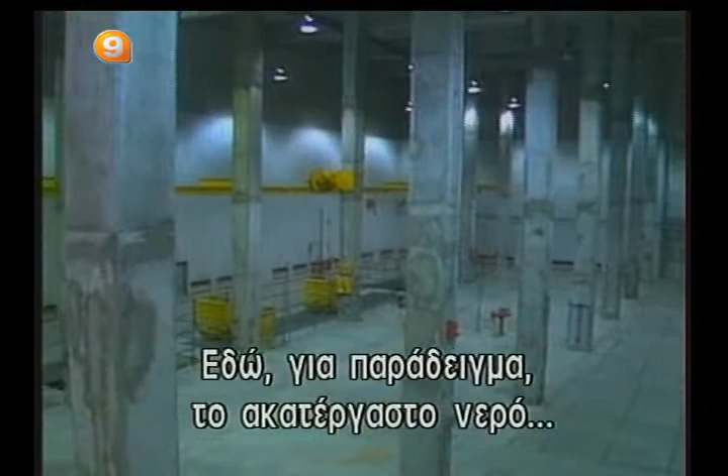Here, for example, crude water is drawn from the central part of the river, where the current is the strongest. It is gathered in concrete lines attached to the riverbed. It is then sent along a descending line that carries it, by gravity, toward an underground basin. The bottom of the reservoir is slightly lower than the riverbed.

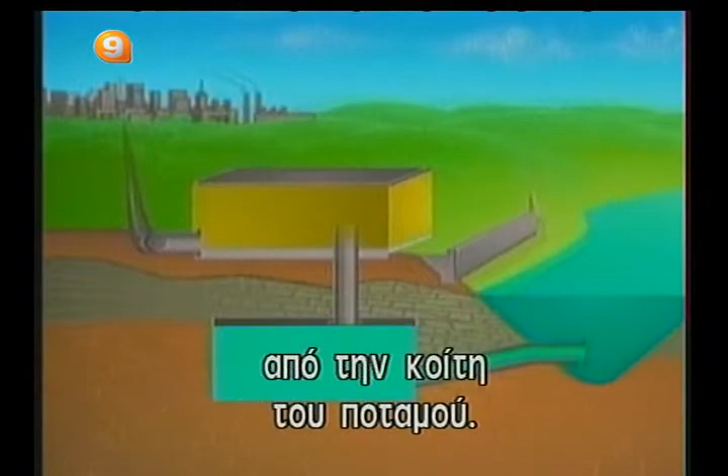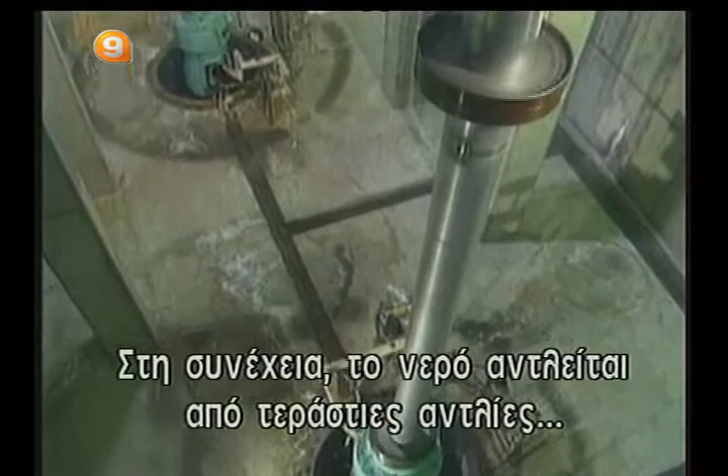When it reaches this first basin, the crude water goes through a rough preliminary filtration called sieving. It then passes through a grate composed of vertical bars, which eliminates large-sized waste. Next, the water is aspirated by enormous pumps, which bring it up into a canal located several meters above ground level. Through gravity, this canal carries the water to the plant.

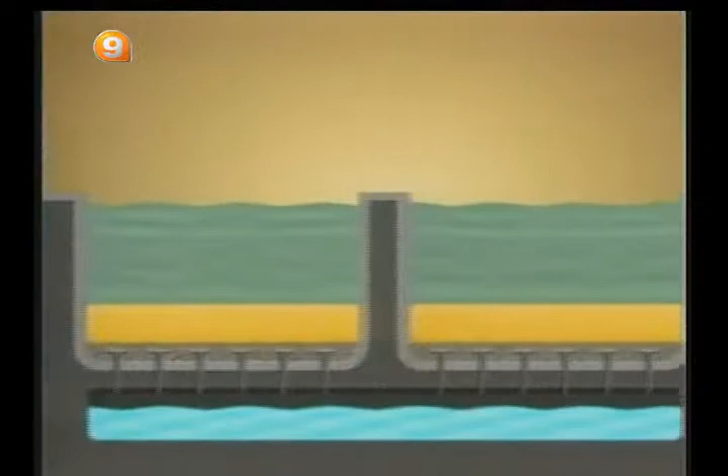The water is directed toward a gallery of 60 identical filters. Each filter receives an equal amount of water to treat. The filters consist of 2 tanks. Both are filled with a 1-meter thick layer of silica sand and a thin layer of gravel.

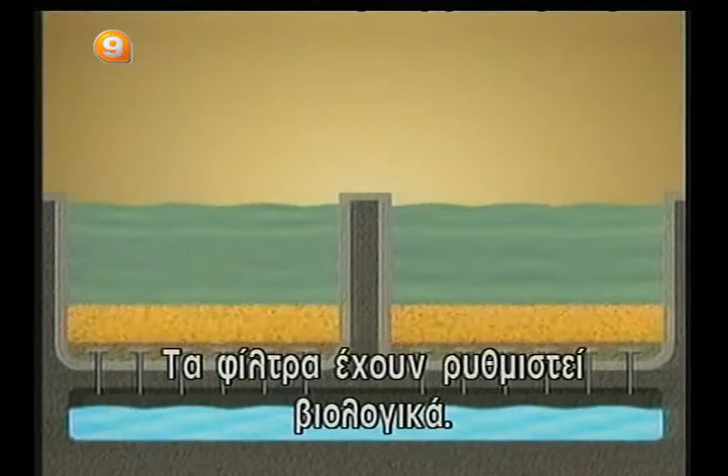The filters work 2 ways. By simple physical action, the sand and gravel capture a portion of the particles in suspension in the crude water. The filters have also been biologically conditioned. That conditioning enables them to digest the organic matter, such as fecal waste, present in the water.

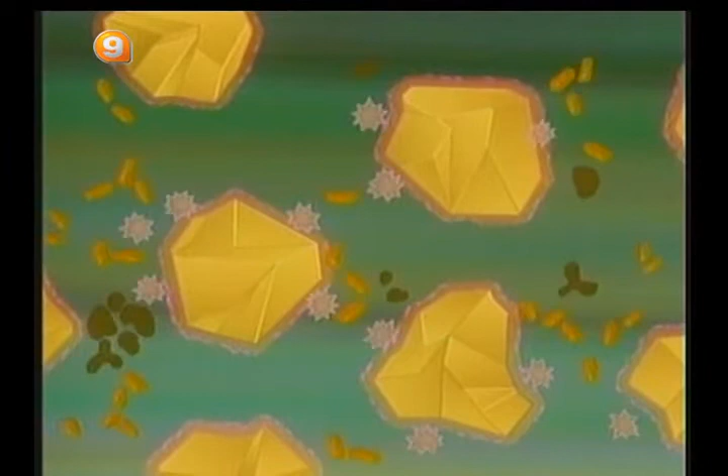A flora of microorganisms called zoogleae develops around every grain. Zoogleae feed on pathogenic bacteria and organic matter in crude water. Little by little, the filters become plugged with the matter they have entrapped. They are then all cleaned to restore their filtering capabilities.

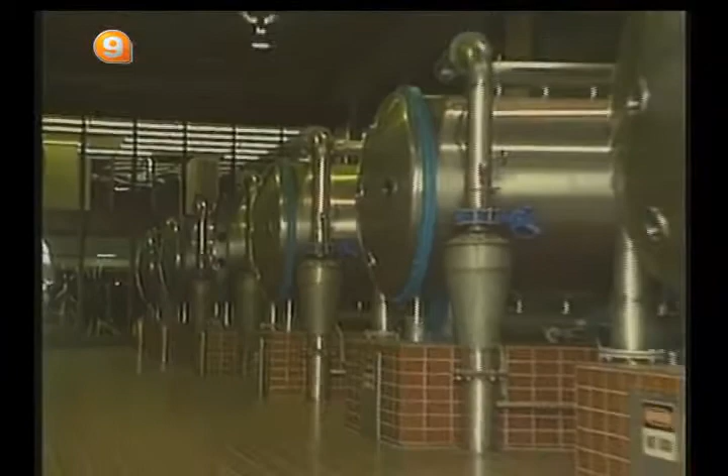This biological treatment removes 80% of any coliform bacteria, water's main pathogenic bacteria. It also lessens the turbidity of the water, that is, the amount of matter in suspension in it. Ozonization completes the treatment. It consists of injecting air bubbles containing a high concentration of ozone into the water.

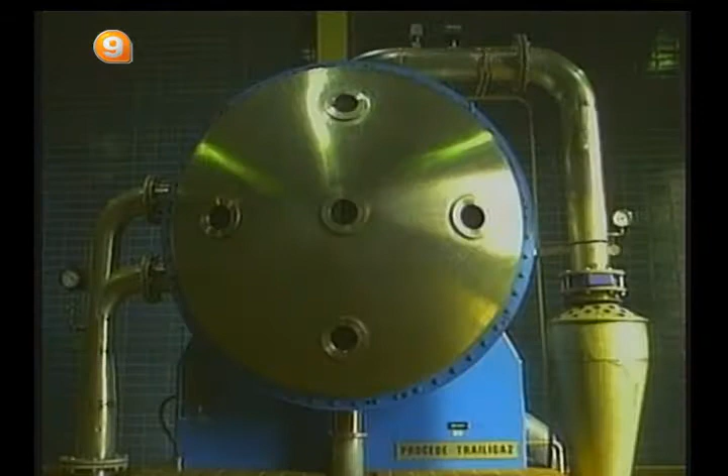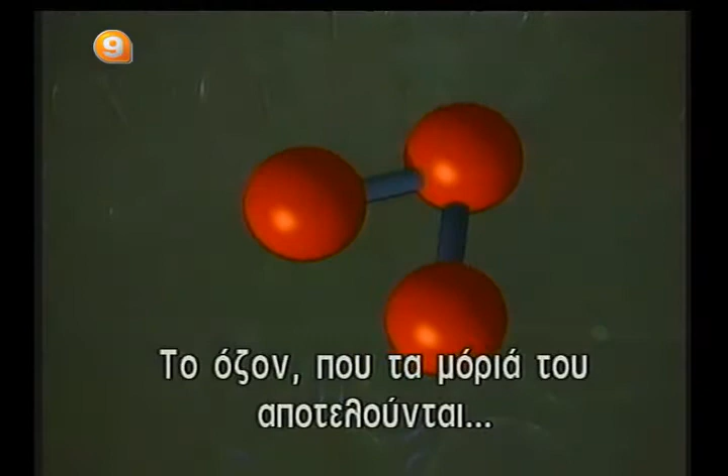Ozone, a gas, is produced by subjecting oxygen in the air to high electric tension. Ozone, whose molecules are made up of 3 atoms of oxygen, has powerful disinfecting and oxidizing properties. It kills any bacteria it comes into contact with.

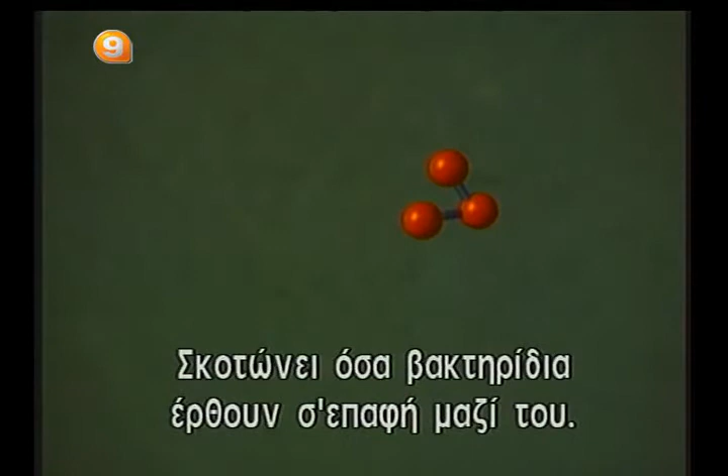In addition, it oxidizes organic matter. That is, it partially transforms it into carbon dioxide and water. It's as if the ozone burned the organic matter in the water.

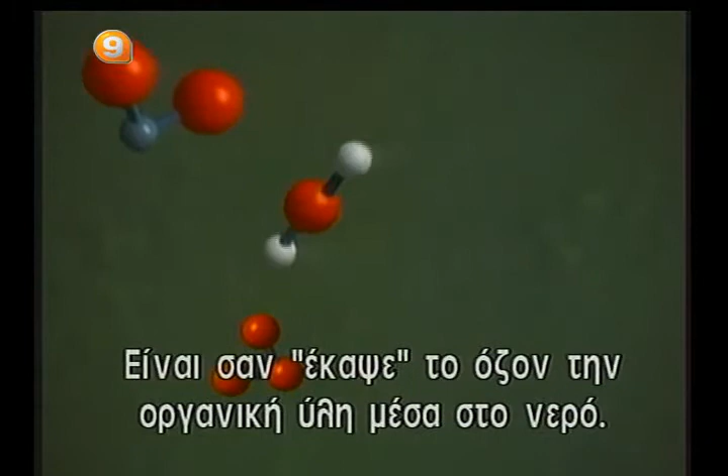After undergoing ozonization, the water is free of all pathogenic germs. Its color, from the dissolved substances, is also considerably improved. The ozonized water is then sent into a very large basin, where, through evaporation, it loses any residue of ozone. This step is necessary since ozone is toxic when improperly dosed.

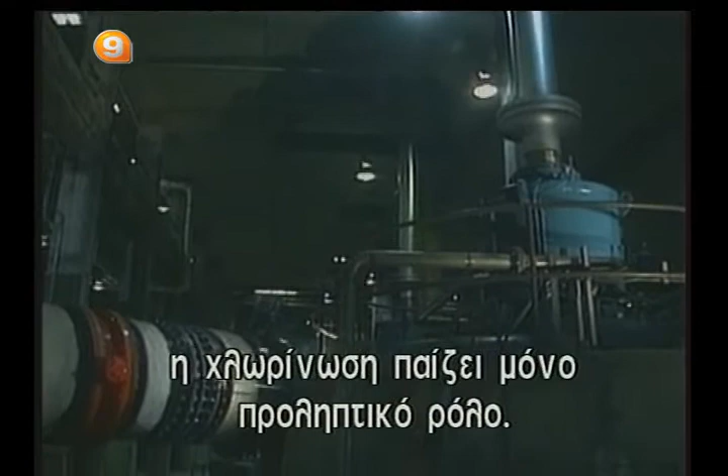Chlorination is the last stage in the treatment. Like ozone, chlorine is an oxidizing agent and destroys any bacteria water may contain. However, when the water has been previously ozone treated, chlorination only plays a preventative role. Chlorine prevents microorganisms from developing in the vast network of canals that distribute the potable water to an entire city.

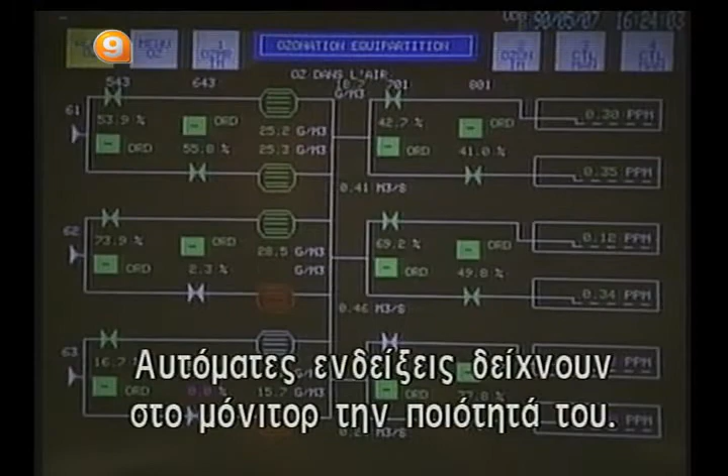In this type of plant, in which more than 1 billion liters of water are treated daily, many precautionary measures are taken. A computer controls all of the stages of the water treatment. Automatic indicators constantly monitor its quality. In addition, the plant includes a laboratory where advanced analyses are conducted. Should the treated water cease to meet public health standards, the population would be notified immediately.

In spite of all these precautions, doubts on the quality of drinking water still persist. Modern filtration plants produce water free of any pathogenic bacteria, but they are unable to eliminate all of the traces of the 60,000 chemical substances which may still be in it. The uncertainty concerning the water we drink is the price we pay for having polluted its sources.

Periodically, a catastrophe will sound the alarm. We're always on the lookout for the slightest suspicious smell, the slightest unpleasant aftertaste, and buying up bottled water, until we find out that it may not be any better.

There is nothing surprising about that. The problem of clean drinking water is a direct result of pollution levels. This is why the treatment of wastewater is so crucial. All wastes, whether industrial, agricultural, or household refuse, end up in the waterways, so water's natural purifying power is no longer sufficient. Sophisticated water treatment systems are imperative.

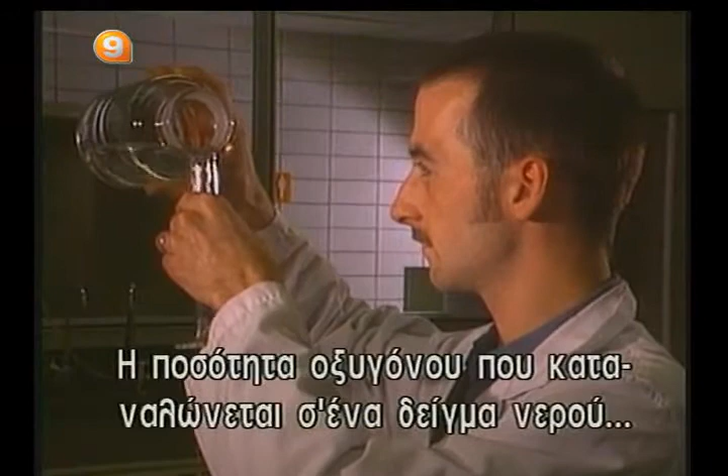When water has become polluted, it's mostly due to the organic matter it contains. The organic matter can come from fecal matter, as well as detergents or paper waste. While generally not harmful in itself, organic matter pollutes waterways by promoting the growth of algae and numerous microorganisms. Because they consume the oxygen in the water, these algae and microorganisms deprive all other aquatic organisms of the oxygen they require. The amount of oxygen consumed in a water sample serves as a pollution index. The higher the amount, called biological oxygen demand, the more polluted the water.

When a polluted effluent pours into a waterway, it causes the algae and microorganisms to proliferate. The water fauna and flora die by asphyxiation.

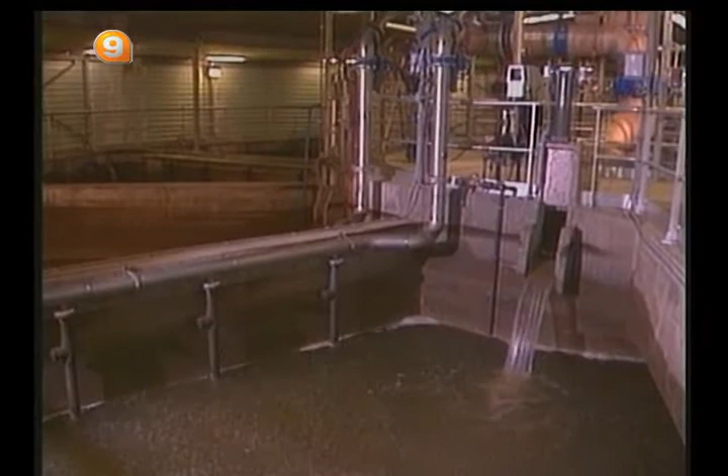Fortunately, several biological water treatment techniques enable experts to reverse that process. One of the most effective is biofiltration. In a purification station using biofiltration technology, the water to be treated flows by gravity into an underground reservoir situated several meters below ground. A mechanical grate removes the larger fragments of waste.

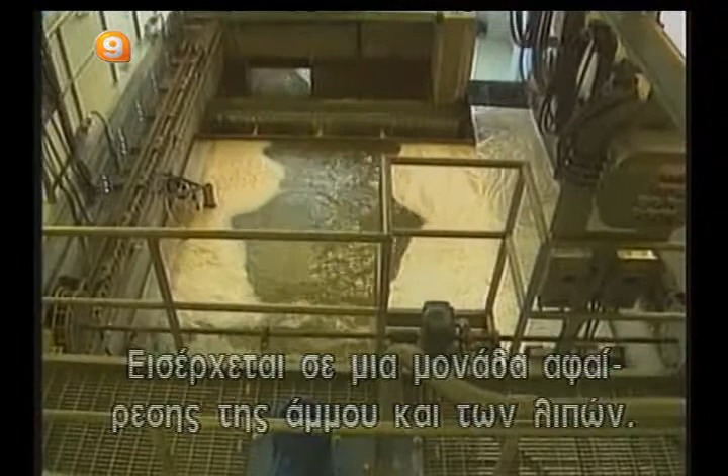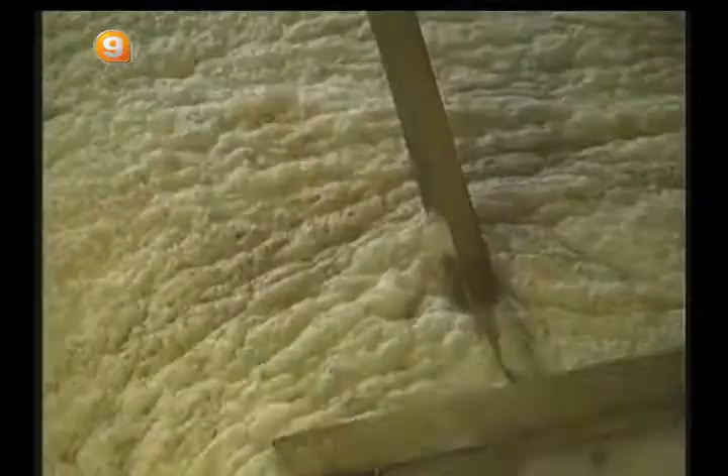The wastewater is then pumped up a few meters. It comes to a sand and fat removal unit. This unit collects the sand in the water by sedimentation. Scrapers pick up any matter floating on the surface, mainly made up of fats. The sand and fats are stored and directed toward sanitary landfill sites.

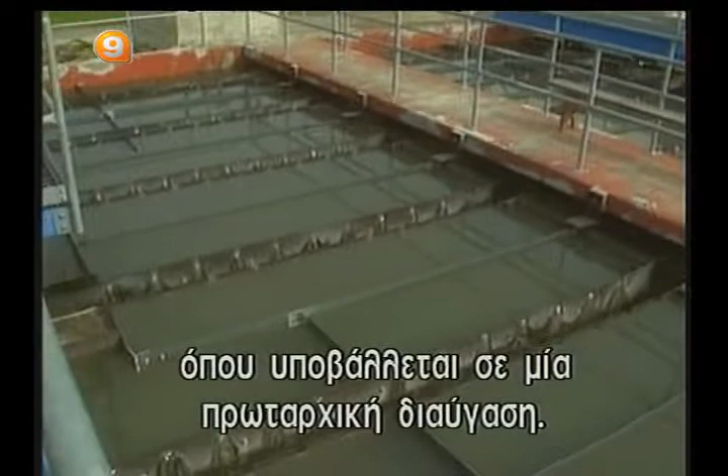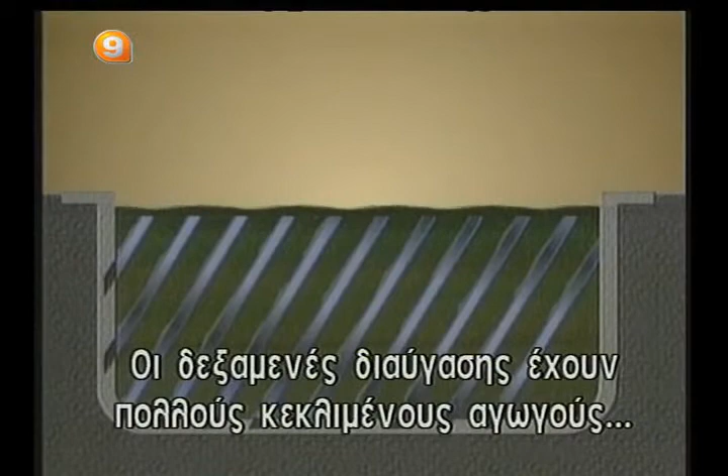The pre-treated water is then sent toward outdoor basins where it undergoes a primary clarification. By simple gravity, the clarification process allows part of the tiny particles of organic matter still present in suspension to settle. The clarification basins here have numerous inclined tubes that accelerate the sedimentation process.

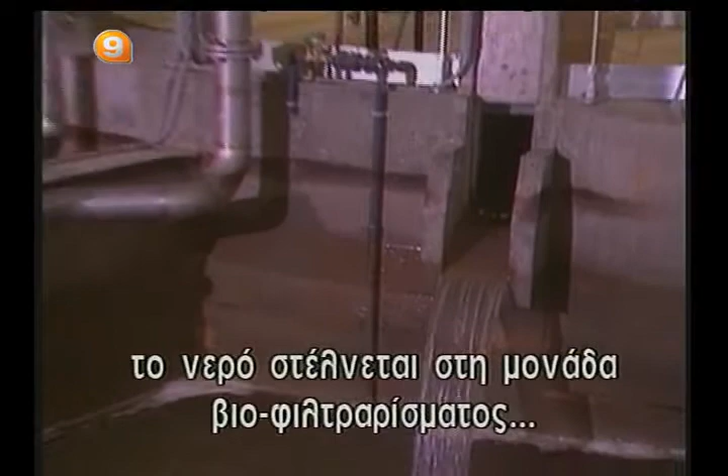After remaining in the clarification basins for half an hour, the water is sent along to the biofilter, where it undergoes a secondary treatment. The biofilter consists of 10 tanks filled with grains of porous shale.

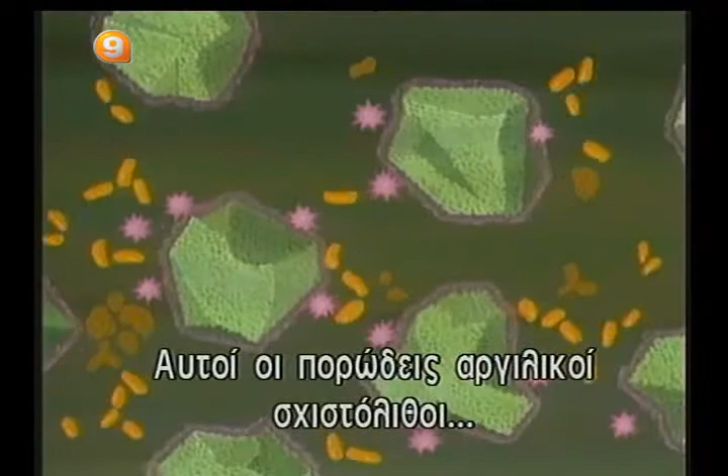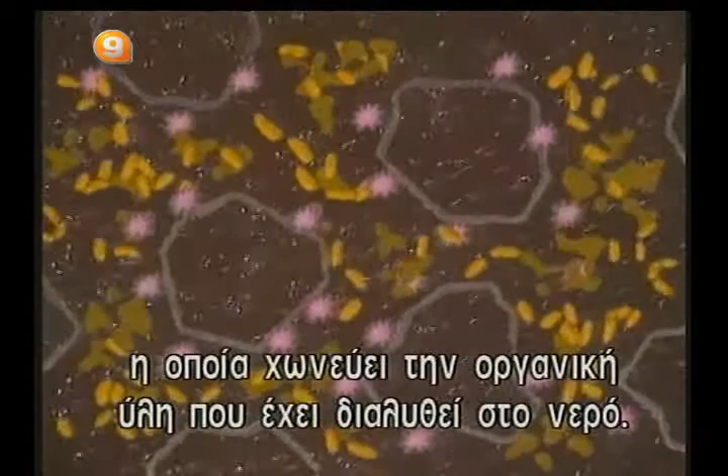These porous shale grains filter out the matter in suspension. They also serve as a support for a biological mass, or zoogloea, capable of digesting the organic matter still dissolved in the water. A small rotary barrel periodically cleanses the filters to rid them of accumulated solid wastes.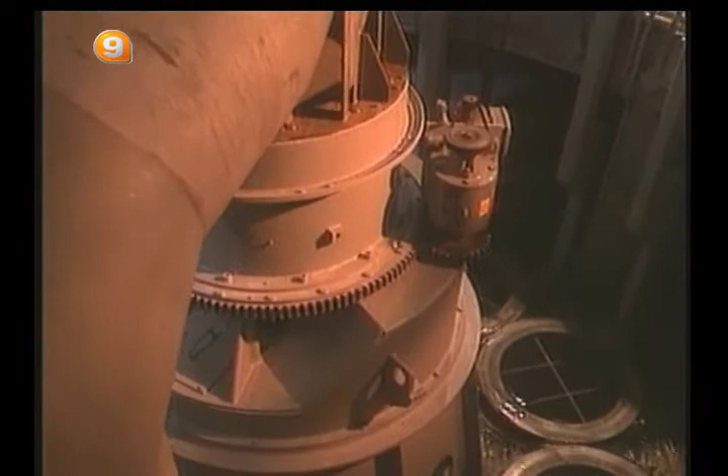The solid matters collected during the cleansing of the filters are combined with those of the primary clarification and undergo a special treatment. First, they are thickened, then sent to a strip filter that extracts most of the water in them. Then the resulting sludge can be taken to a landfill site.

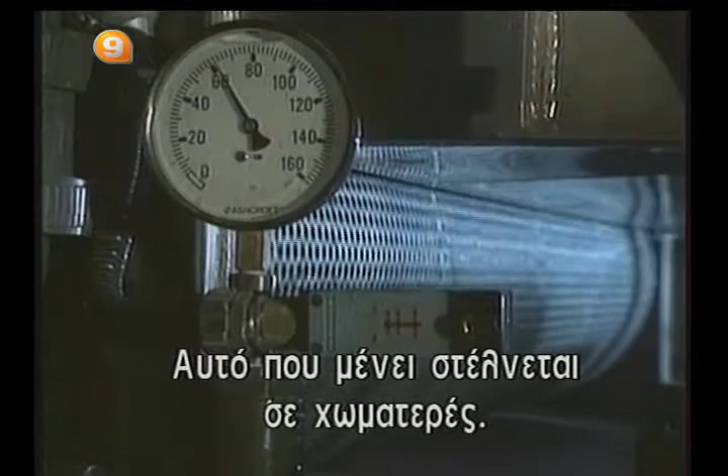Following the primary and secondary treatments, the treated water's biological oxygen demand only reaches a quarter of that of crude water. The effluent can then be safely released into a waterway. The residual organic matter in the effluent will be eliminated by the waterway's natural purifying power.

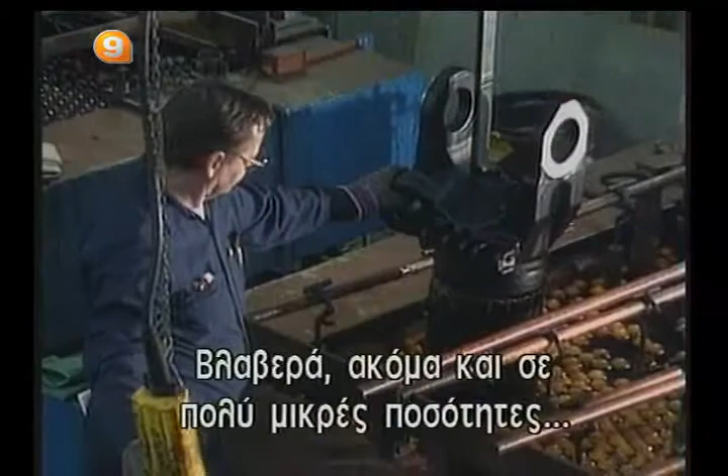However, this kind of plant does not purify wastewater of inorganic chemical substances. These substances, such as heavy metals, are discharged by a large number of industries. Harmful even in very small doses, they represent a serious health threat. However, it is possible to get rid of these wastes.

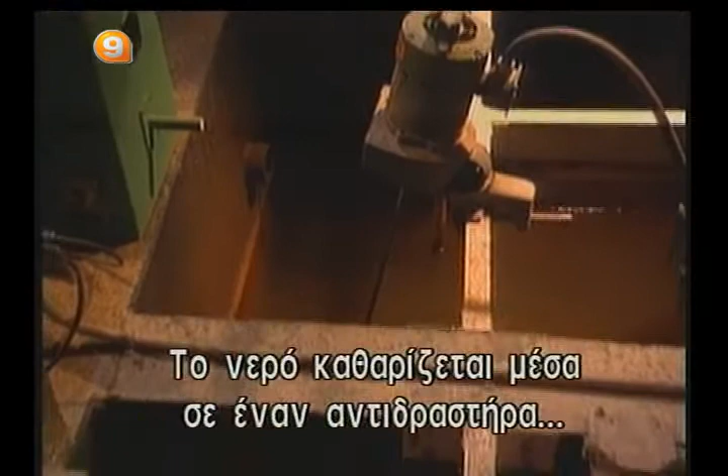Heavy metals, for instance, and other chemicals such as chrome, nickel, and cyanide can be eliminated from industrial effluents through chemical processes. The water is treated in a reactor in which a chemical substance has been poured. The resulting reagent has the property of sticking to the heavy metals dissolved in the water.

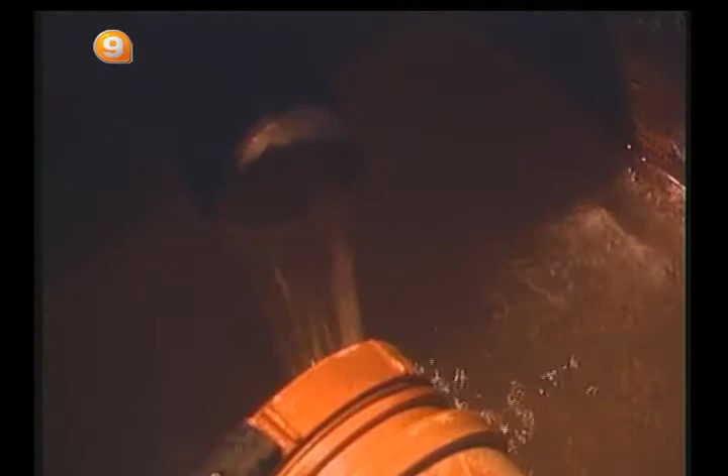The heavy metals then settle at the bottom of the decanter, where they form a metallic sludge. This sludge can be directly recycled into the industrial process or recovered in the form of a solid metal or a metal salts solution. The water itself is cleansed of its toxic compounds and can be safely returned to nature.

We've reached the point where we have to wash our water. The production of dirty water has to be reduced, if not stopped. Better not to soil rather than have to clean up.

Obviously, what motivates companies to develop non-polluting production technologies is profitability. Now ecology rhymes with economy. We're beginning to listen to the people we thought were dreamers.

We're even starting to think about waste as a resource, a gold mine, in fact. What can we do with all those mountains of old tires? Well, it seems researchers have found a solution that is both radical and profitable: pyrolysis under vacuum.

When archaeologists of the future study our civilization, they will probably conclude that it was the age of waste.

A sad testimony to our insatiable need to consume. Mountains of rubbish are strewn all over our planet. On top of being hard to conceal, these eyesores pose a real threat to the health of mankind and the equilibrium of the globe.

Today, almost any waste can be recycled. A new technique has been developed whereby materials as diverse as old tires, oil residue, wood shavings, and household refuse can be recycled into useful compounds.

These materials can be recycled into useful compounds. This promising new technique, developed by a Canadian researcher, is called pyrolysis under vacuum.

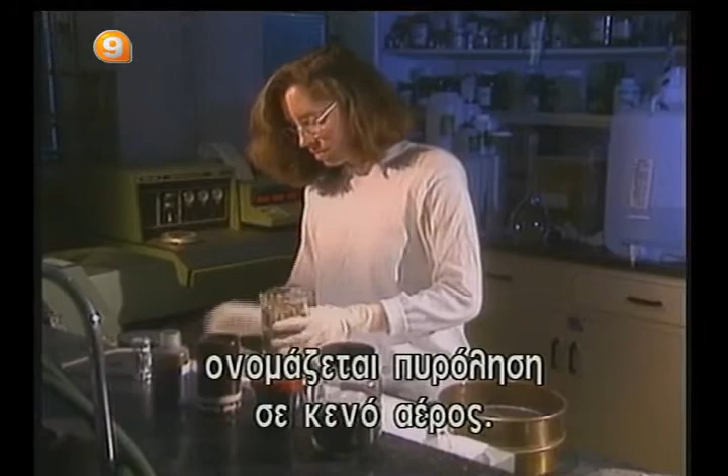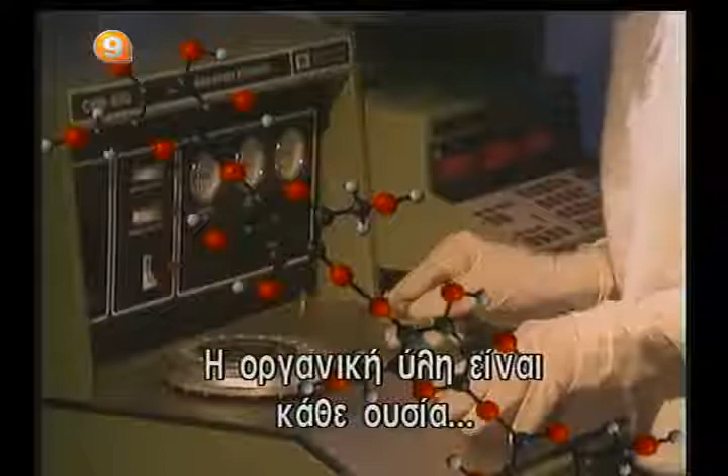Pyrolysis is a chemical process that causes organic matter to decompose. Organic matter being any substance mainly composed of carbon and hydrogen. Most organic compounds are made of long chains of atoms of carbon, hydrogen, oxygen, and occasionally other elements.

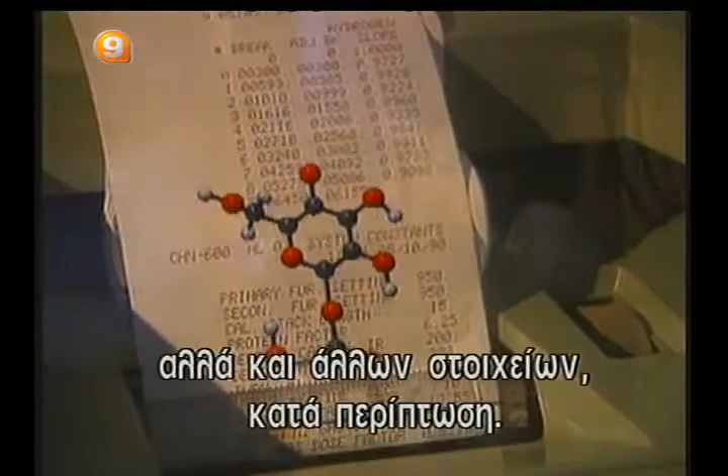Pyrolysis consists of heating organic matter moderately in a reactor in the absence of oxygen. Under these conditions, the chains of carbon atoms first begin to vibrate, then they break into smaller molecules.

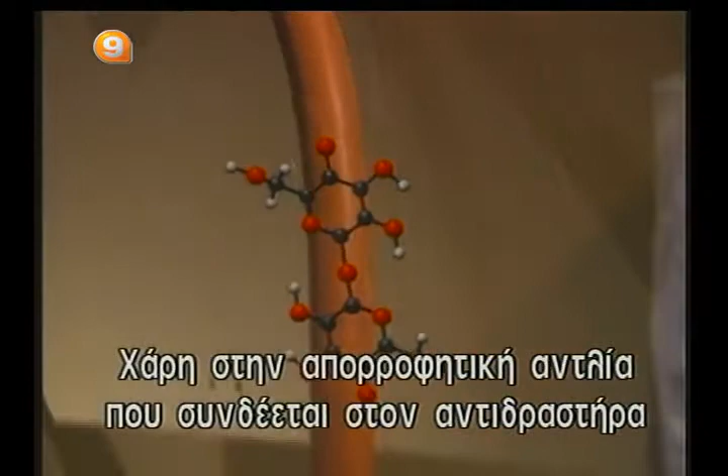Thanks to a vacuum pump connected to the reactor, the little molecules can be recovered. They are aspirated by the vacuum pump, then condensed when they leave the reactor.

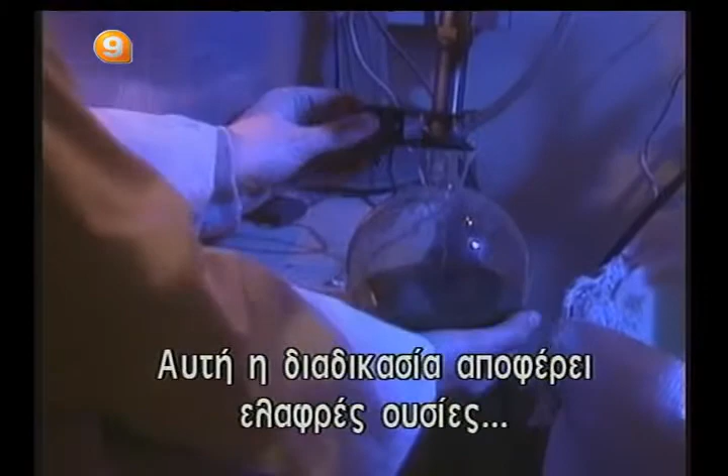This process yields light compounds such as pyrolytic oils, waxes, water, or coal. All these compounds are reusable.

This technique seems a far better solution to waste disposal than traditional incineration. In an incinerator, wastes are burned at very high temperatures. Moreover, they are exposed to the oxygen in the air.

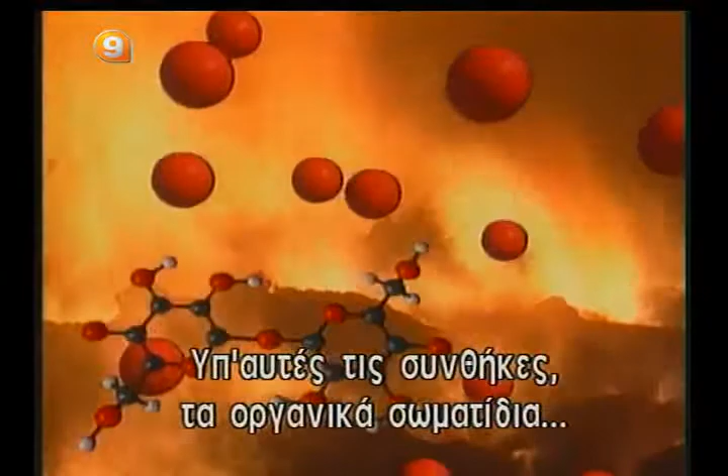Under these conditions, the organic molecules combine with the air's oxygen to form steam and carbon dioxide. The organic matter is therefore almost completely destroyed.

But some organic molecules react among themselves to form toxic compounds such as polycyclic aromatic hydrocarbons, which have carcinogenic properties. Moreover, incineration produces large quantities of volatile ashes, and they too can be toxic.

Even the carbon dioxide released into the atmosphere by incineration has harmful effects on the environment. Its molecules absorb the sun's infrared rays. This generates a greenhouse effect liable to cause global warming.

Conversely, pyrolysis under vacuum creates little carbon dioxide and no toxic compound. Furthermore, it takes place in an airtight reactor. None of the reaction's products are ever released into the atmosphere.

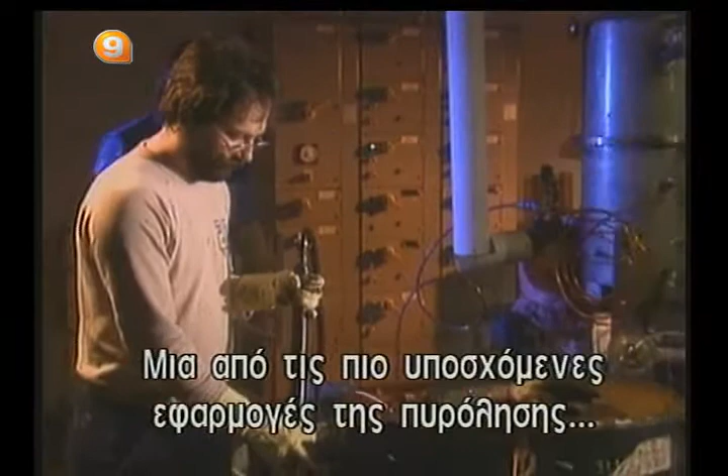One of the most promising applications of pyrolysis under vacuum is the recycling of oily wastes. Oily wastes, a result of gas refining, pose a serious threat since they can infiltrate into the ground and underground water expanses.

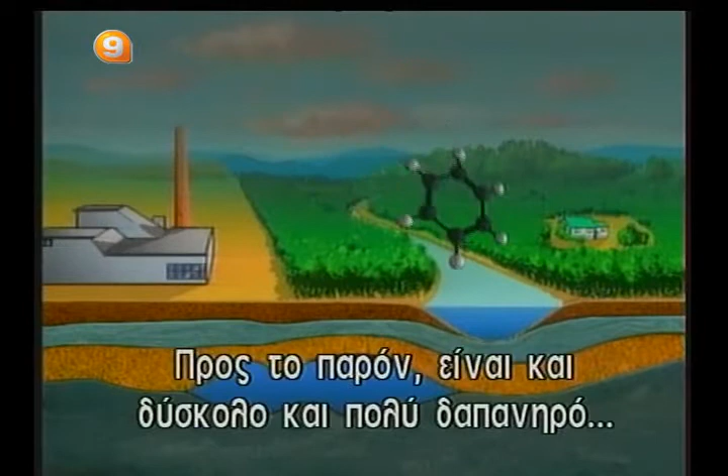At present, it is both difficult and costly to get rid of them. Pyrolysis under vacuum converts these wastes into usable, environmentally safe compounds, such as oils, water, and clean gases.

The toxic compounds in them, such as heavy metals, are trapped in a solid waste. The waste can be buried without any danger of it contaminating the soil.

In addition, the energy the reactor requires can be obtained by the combustion of the oils created by the process itself. The pyrolysis under vacuum of gas sludge costs 10 times less than the traditional methods of disposal.

Another promising possibility for pyrolysis under vacuum is the recycling of old tires. Tire dumps are time bombs for the ecology. Up until now, there was no way to get rid of the tires without damage to the environment.

On the other hand, pyrolysis under vacuum destroys old tires and generates useful compounds such as heating oil, carbon black, synthetic fibers, and steel. Researchers are also trying to apply this technique to recycling urban waste and wood shavings.

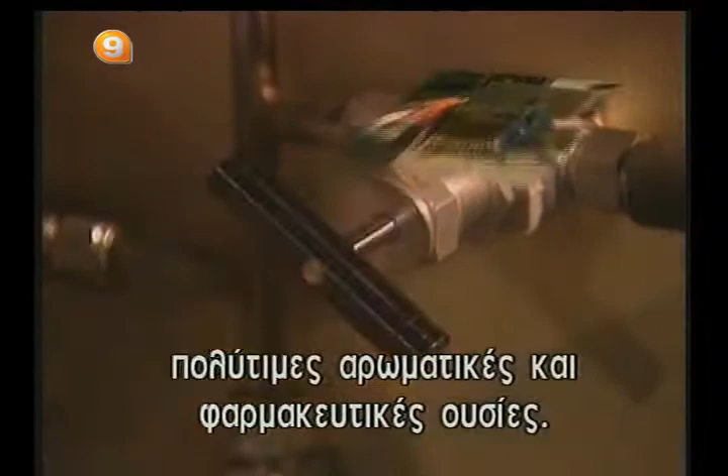The latter could produce highly valuable aromatic and pharmaceutical compounds. Pyrolysis under vacuum demonstrates that protecting the environment is not as expensive as some would have us believe.

Like other recycling methods, pyrolysis might lead to a new industry that would create profits, jobs, but not pollution.

A few years ago, a generation of artists working with refuse took their place in the art world. We saw everything: performances in the middle of trash cans, installations of old car bodies. These artists were trying to awaken people to what has become an emergency for the whole planet.